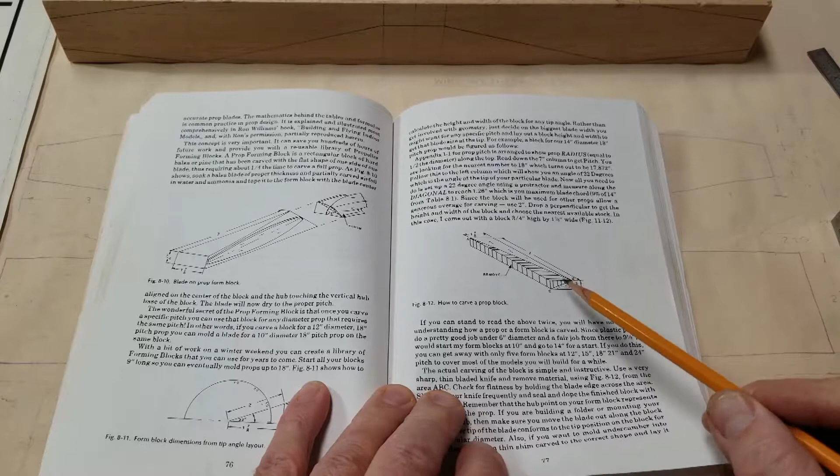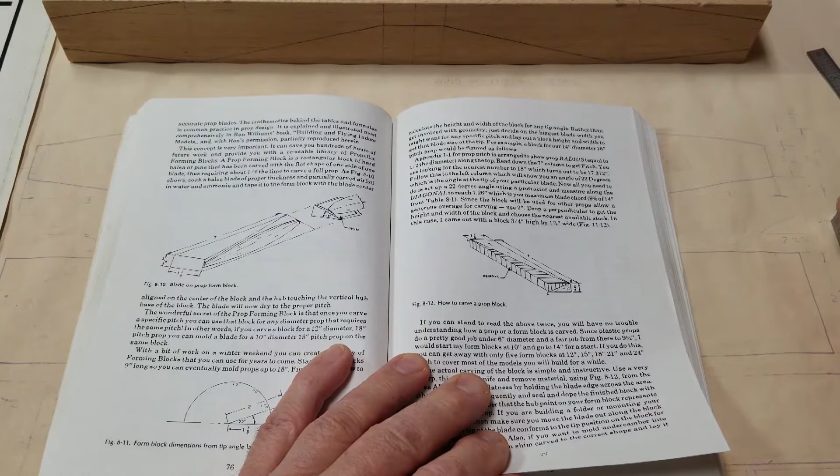This is interesting here. These are the cuts that you make to get your pitch on each blade, and this is actually a prop block for molding prop blades. I'm going to be doing a prop out of a solid block, but this technique of cutting these out, and then you actually cut these off and follow the pitch. So where each of these cuts begin and end, it creates that pitch.

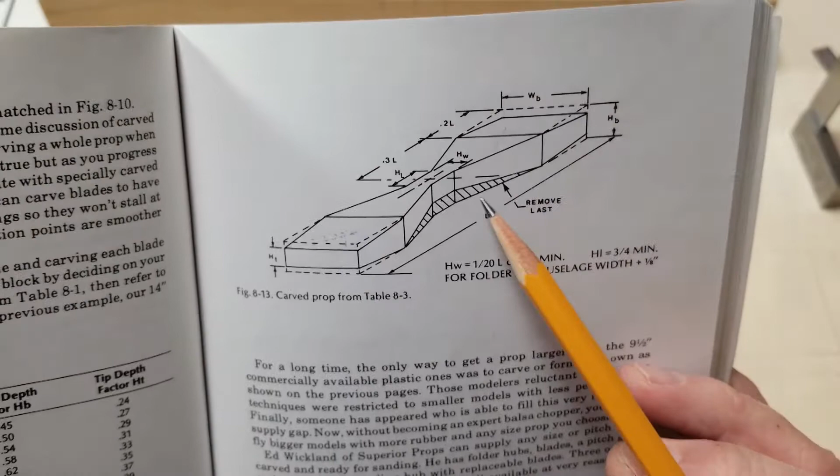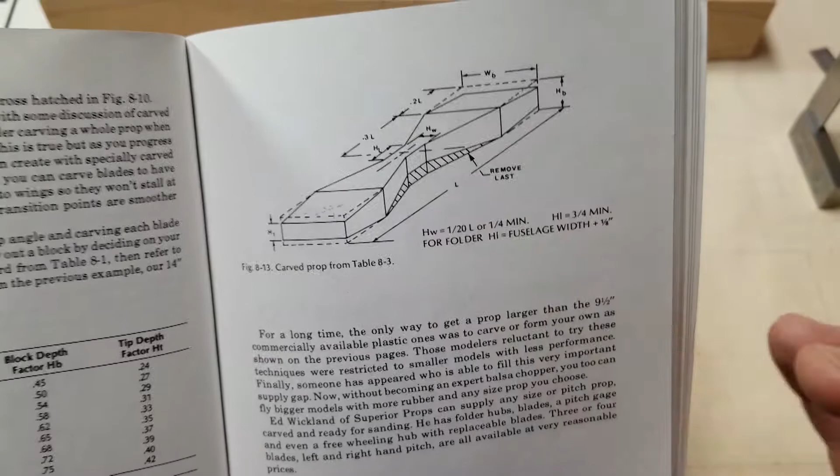It has tables in here for figuring out the dimensions for these blocks, which I don't have to do. I have these dimensions. But here is a key point. This shaded section right here: remove last. So this is the front of the prop. We're going to be cutting on the back side, using this area here to cut corner to corner to create that pitch. And I'll show you in a little bit what that does for carving the prop.

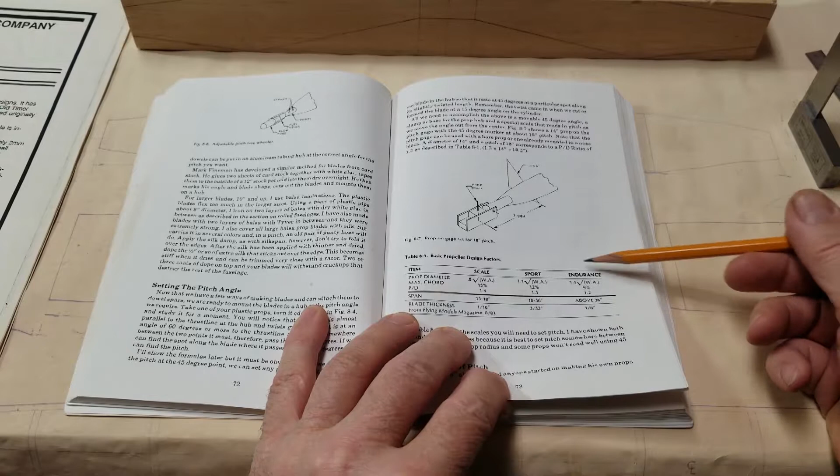If we go back to the beginning of this section, just to share a little more about figuring out the dimensions for the block, use this table. This is the model type. This is endurance model. Here's how to calculate, based on your wing area, the prop diameter, and then the percentage of that for the width. And the one I'm most interested in is the pitch diameter ratio. So for an endurance model, you'd have a 1.2 to 1 pitch diameter ratio.

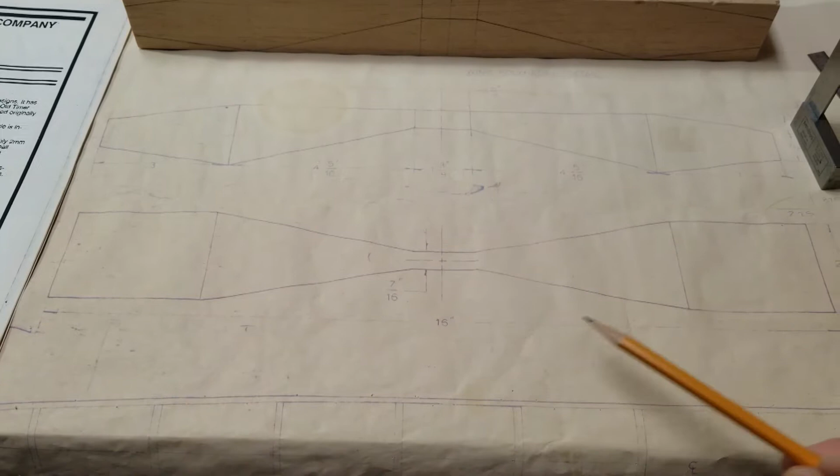So now if we go back to here, you would use the maximum chord and your pitch diameter ratio to come up with your dimensions for your block. But the reason I was looking at that is now I can tell you that a 16-inch diameter prop with a 1.2 to 1 pitch diameter ratio would be a 16-inch diameter by 19-inch pitch prop.

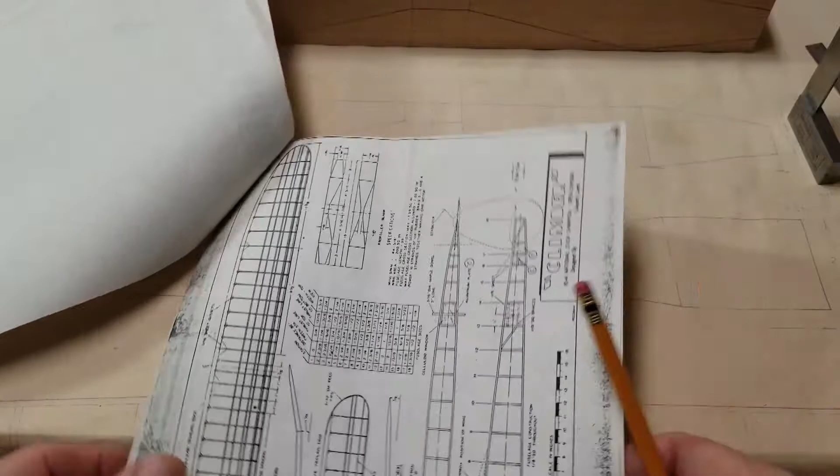But here's why I have to use these prop block measurements. I don't need to do the figuring like in the rubber powered model airplane book. In SAM events, you must use the prop that was used originally on the model. So there's that. Very interesting. And the bigger deal is, I have a full-size print that Midway Models supplied.

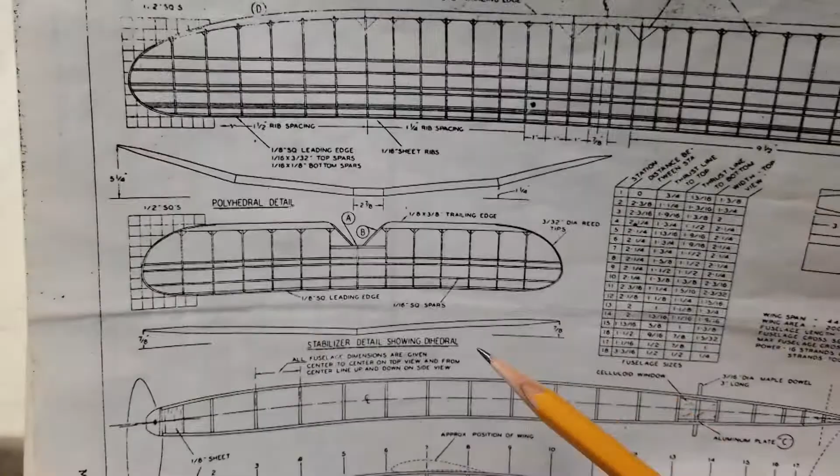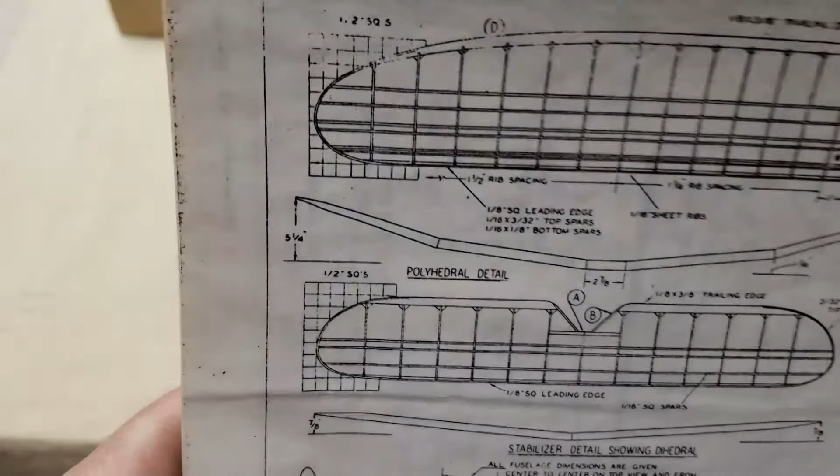What they would do in these magazines is, this is the size of a magazine page, and they would give these reference points here. So here is a table for the dimensions. You'd have to lay this out yourself on a board to build your fuselage. And then look at the stabilizer and the wing. They actually use graph paper. So you would have to lay that out yourself to build it. And now I have the print. It's not even laid out the same as my print.

So here's your prop block dimensions. There's your specifications on the model. But here's the big find. They did the rudder because it would fit on; all parts in the sheet are full size. And here's the layout for the ribs. A few other things on here, like the trailing edge of a wing, rudder ribs, a lot of stuff here. Here's the big one that I was going to wing it.

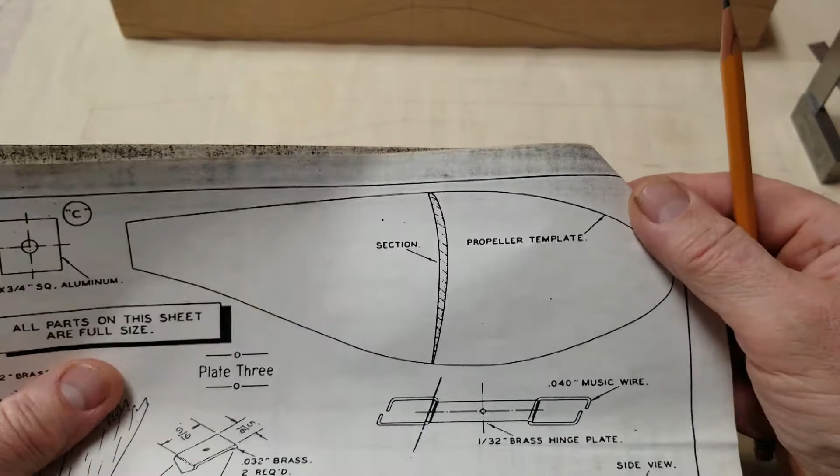I thought I didn't have it. The prop template. So after you carve the block to these corners and then you establish your thickness, then you cut out your outline of the prop. So this is really good. I have the propeller template.

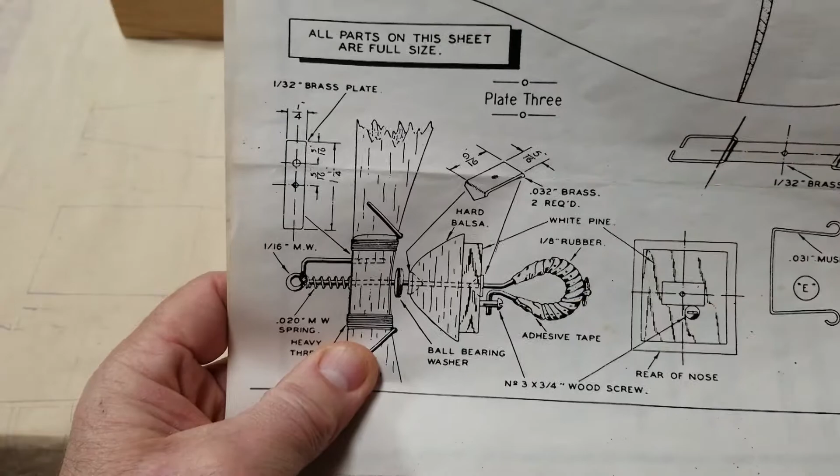It also has the folding prop, the hinges, and the stop design here. Looks like what he did back then. Material to make it, I won't be using that. I'll make it the way I make my folding props.

Just thinking, going back to this flying section on this article, Ed Lamb has his set up for a right climb, right glide. And I want to do a right climb, left glide. But that's confirming the airfoil on the rudder is causing the model to turn to the right.

Okay, I have my prop block dimensions laid out. So I have this view drawn on the top and on the bottom. And I have the side view laid out on both sides. When we cut the pitch, we're going to have it turned over this way, the back side of the prop. I have it marked with the F for the front.

And the reason I have it marked all the way around the block is I need these to be accurate cuts, because when I cut the pitch down through this block, I'm going to be making saw cuts close together, probably 1/8 inch apart. I'm going to be going to the corners that are established from these cuts. So I'm going to be making cuts starting on this corner, going up to this corner. That will give me my tip pitch.